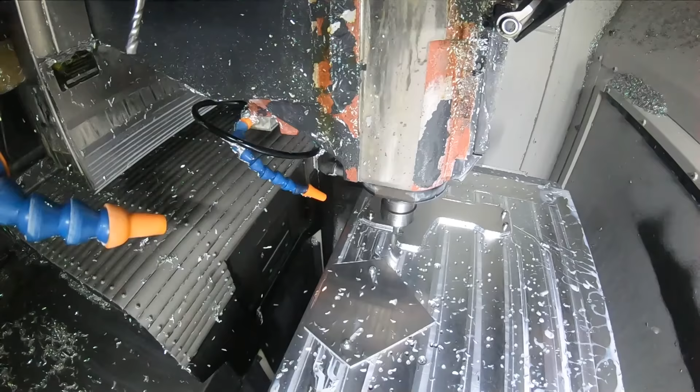So coming up, we break this down into the following topics. Now you'll see the timestamps next to each feature, so feel free to skip to the area of interest, but don't go anywhere yet, as before we head into section 1, cutting tools and tooling, I got Gio and Paul to do an elevator pitch for the subject for those that don't know what a VMC is.

So what is a vertical machining centre? Well, it's normally a three-axis machine where you've got an X, Y and a Z. It's housed in a perimeter guarding so that you don't have swarf flying out and coolant and all the rest of it. It's also got a tool changer integrated into the machine in order to improve productivity, and it's controlled by normally a Fanuc or a Siemens or a Heidenhain or even a third-party control. That generally tends to make up what I'd call a VMC.

What is a VMC? A VMC is a machine tool that makes things. It's referred to by many as a mother machine. It's got a Z-axis, an X-axis and a Y-axis and a spindle that rotates. The components stay stationary on the bed of the machine tool. You can program it with a programming language, and there's several that you can choose from. And watch this program to find out how you can make it more efficient.

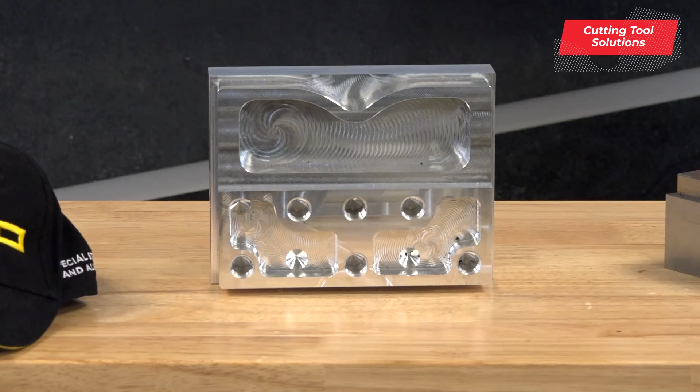So Gio, in this section we're going to talk about how you can improve efficiency by using certain cutting tool strategies and products. Maybe let's look at parts like we've got here and talk about the ways of doing more on a component with less tools, because that's really what it's about, isn't it?

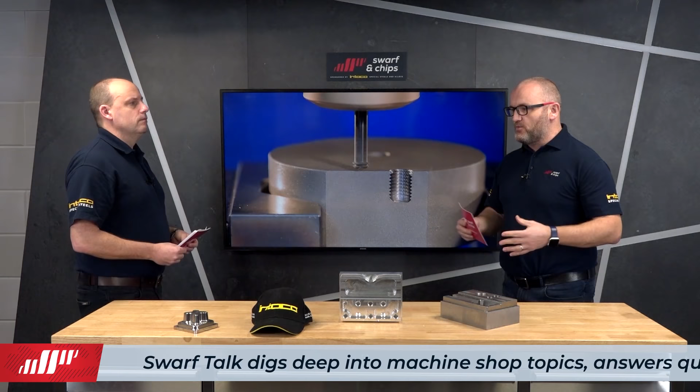It can be. There are times to use more tools to get cycle times down and things like that, but as we look at automating processes now, if you're retrofitting a robot to a machine, often you don't have enough tools in the machine, because what you don't want to do is automate a process but then have to change your tool orders every operation. So using tools that are universal can reduce operations and reduce your inventory, and the amount of tools you need on a particular job can only be advantageous.

But is it a good argument to say that those particular products won't be as good at the individual tasks as maybe a dedicated tool? No, not always. Certainly if you look at solid end mills, years gone by you'd use a 3-flute for pocketing, you'd use a multi-flute for profiling, maybe a 3 or 4 flute for slotting. Whereas now there's some pretty good tools at doing everything out there. If you're doing aluminium, ideally you'd use aluminium tooling, but take that out of the scenario, there's some pretty good all-round tools now.

Okay, let's look at what we've got here, because these are some good examples, aren't they? This is obviously thread milling. Yeah, so this here is a Gühring tool. It's a drill mill, as I call them. They've all got their fancy names, but essentially that's called a Diver, I think Gühring call it. But let's keep up with how the screen's moving. We'll come back to that.

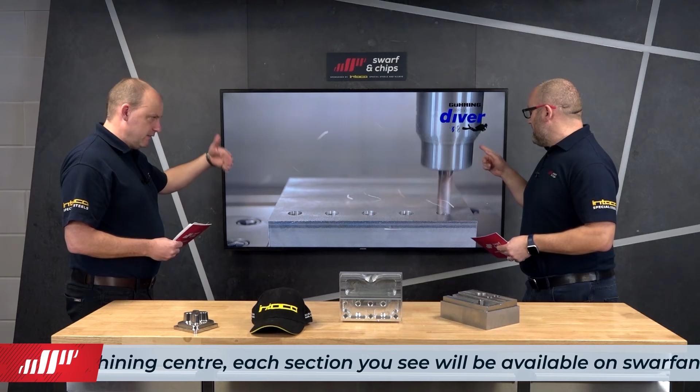Okay, so this is the Gühring Diver. With this, you can see here it's slotting down at various angles. It goes to 45, then it actually drills. And you can drill and open up the pocket with that tool. It's good for profiling, it's good for slotting. So you can see this can replace 2 or 3 separate tools.

And is it capable of cutting steels as well? Yeah, so this is steel we're seeing here. I've seen it in heat resistant alloys also. Clearly you're not gonna use these types of strategies and data, but it's a good all-round tool for sure.

And isn't it going to wear quite quickly though? When you look at the speed that's... No, you'd be amazed. You'd think that, wouldn't you? But that's what these tools are designed to do. So quite the opposite. Okay, next one, we're moving on here.

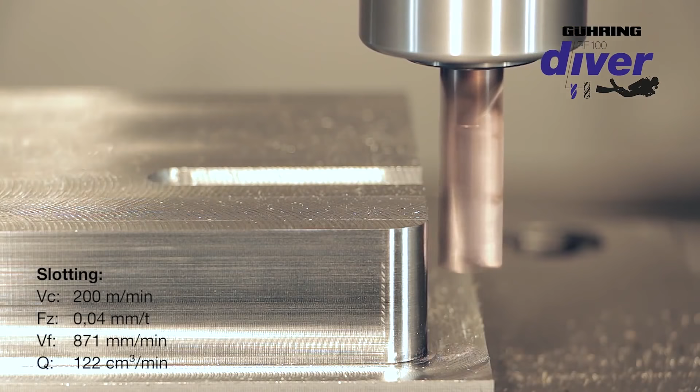This is quite interesting because I remember when I used to be machining the big casings on the diesel engines, I used to have to do chamfers on the bottom and on the top, and there were always different tools. Yeah, so this is basically a drill. It chamfers top and bottom as well. The chamfer's actuated, so you do the top, then it goes back in, retracts, and you go to the bottom, it comes out again, and you do the bottom chamfer.

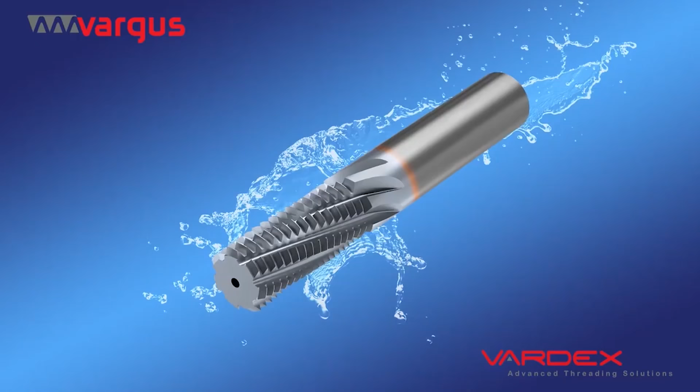And how does that work? Well, that one I believe is driven by coolant. The through coolant puts pressure and it pushes out the chamfer tool. And we're seeing here again another example of opening up a thread. Yeah, so that's been sectioned just for the video essentially. But again, this is a Vargus tool. So that drills, threads and chamfers all with one tool.

So you can see, again, if you haven't got enough positions in your carousel and you don't want a dedicated chamfer tool or a drill even, that does the job great. Because going back, I used to have a drill, an M6 tap, an M8 tap, an M12 tap, but now all of that can be done with one tool. So maybe the tool carousel is important, but if you focus in this area, you can achieve great things with independent products. That thread mill will be for a particular pitch, but you can do any sort of diameter as long as that pitch is the same.

Looking at this part here, would you say then that with all the machining on here, you could minimise the amount of tools that you use? And if you did, would it affect the cycle time if you were trying to use one tool to fit all? Yeah, so that one was done at Fanuc, wasn't it? A live we did, and from memory, probably 6 or 7 tools on there. You could do that definitely with 2, in theory.

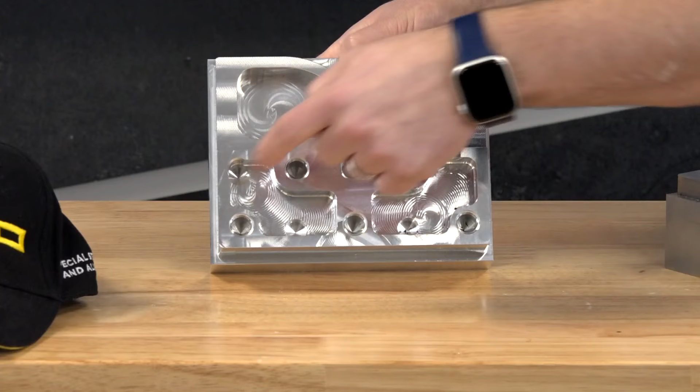2 tools. You could do a universal end mill, aluminium geometry, to do all the roughing and the pocketing. And the threaded holes could be done using one of these tools we've just seen on the screen, which drills, threads and chamfers. Right, so section 2, work holding.

Gio, it's your favourite topic. Firstly, what are the problems in this area in 2 minutes? Go. I'll try my best in 2 minutes, Lindsay. Work holding is probably one of the main aspects in which you can increase efficiency on a VMC for sure. But I think one of the biggest problems is that people don't even know that they've got a problem. And if they don't know, they don't know.

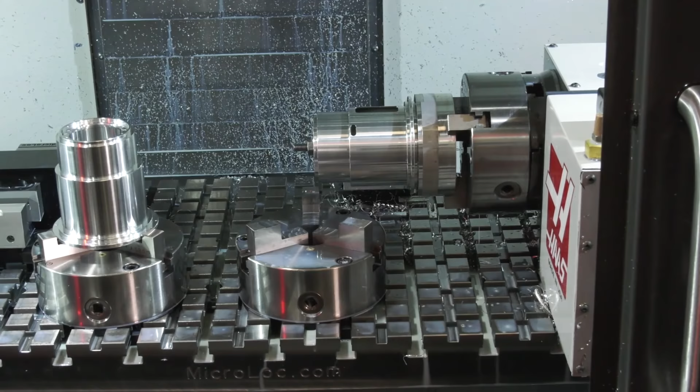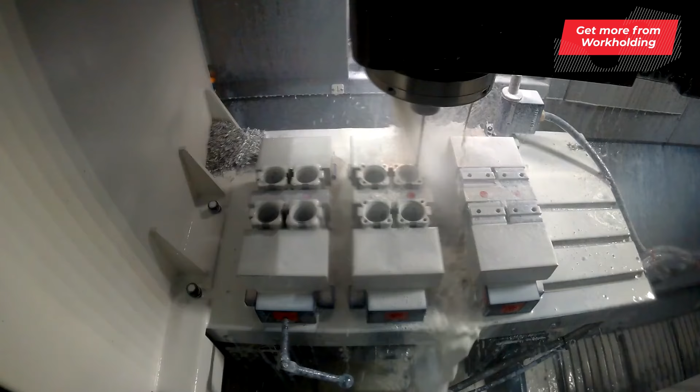You've got different volumes of work that you can put through a VMC. So some people will say, if you're doing low volume work, why do I need to increase my efficiency? Because I'm just doing one today, I might do another another day. I had someone say that the other day. And that is a big argument, and to a certain degree there is an element of truth to that, dependent on the kind of work that they do. However, whether you're doing lower volume work or higher volume work, you can still increase the efficiencies of your VMC through work holding and getting the best work holding on your machine tool.

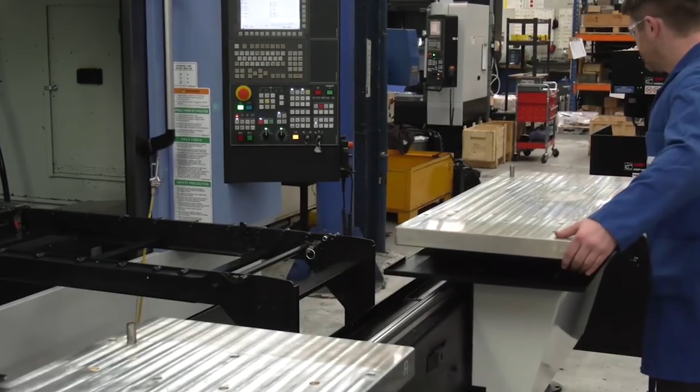Now, the biggest pain point, in my opinion, would be that you're not palletizing your VMC, so you're doing all of your setting in the machine tool, and if you're doing that, the spindle is not turning. So by palletization and universal datum points within the machine tool, you can do all of your setting outside the machine tool, and then when you load the machine tool, the datums are already set. That's absolutely massive, whether you're doing low volume or high volume work.

Another big pain point in work holding is if you're using old technology and you're not holding the part securely, you get vibration, and then you can't run the machine tool to its full capability, so you've got to reduce speeds.

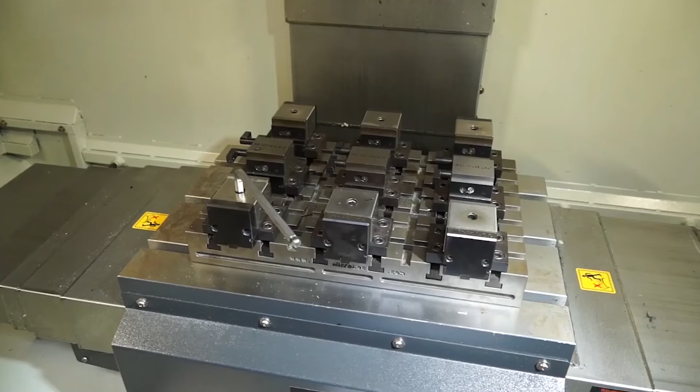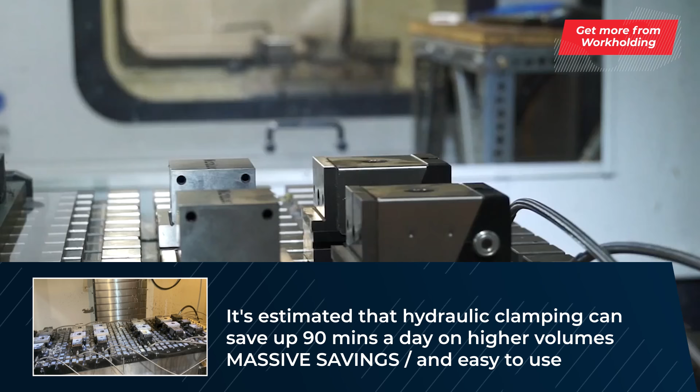You don't get the best tool life longevity, so again, this is very inefficient. Also, with the palletization and moving back to that, another big point, this is probably going into different areas, but the work holding, you can automate it. So if you're looking to run 24/7, this is through work holding, and it's something that you should seriously consider. And I think that's about it for pain points, Lindsay.

Yeah. I've got nothing left to say. You've got nothing left to say, but we've gone well over 2 minutes, and he's delivered all of it.

I think the points he makes are so correct. I think the more you see the guy or the lady in the machine taking parts out, clocking things up, they are what you need to eliminate. So any work holding solution that you can add to that.

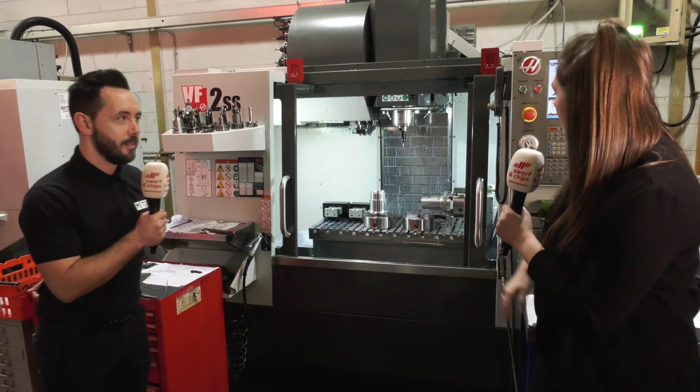Right, okay. So now for some more solutions, and here's an example of what you can get from your VMC using creative work holding. Chloe, perfect example here at Mill Turn of how you can present multiple components to the spindle, and not the same components either. No, definitely not. So as you can see, we've got 2 setups in the vise, so that's used for the VMC. We've also got 2 chucks on there, so we can hold cylindrical material, not just blocks of metal. We've also got a 4th axis unit on there, so you're utilising your VMC while adding an extra axis on there.

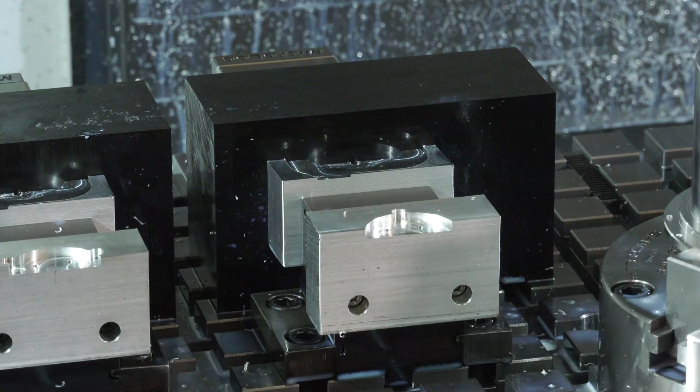Now, when moving from one component to the other, how do you do that with the datum shifts? Can you explain to our audience how you program that? Yeah, definitely. So one part will have a G54, and then the next one will be G55, G56, and so on and so on. And they will all have their own work offset, so they're all their own datum point. So with a setup like this, if you wanted to run it overnight, all you have to do is call up those programs with the set offset.

And what does this give to a company that's got 3-axis machine tools? Is it all about flexibility? Of course, it's all about flexibility. You can then move on to another part. You don't have to keep the cylindrical material on a lathe. You can move it onto a VMC like this. And basically, it's utilising and getting the best out of your machine.

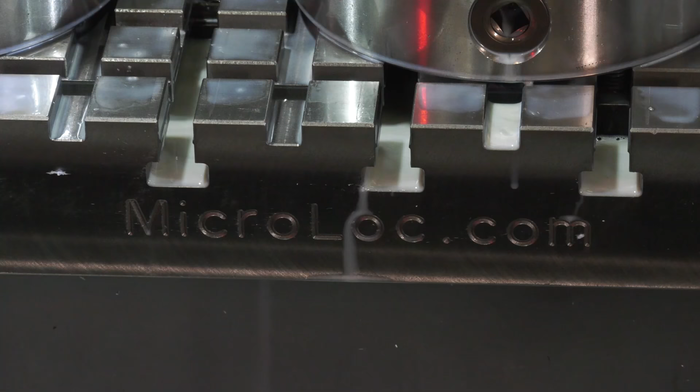Now the base, the MicroLoc base, it's all gridded. What benefits does this give you? So the MicroLoc is great because, like you said, it's gridded. You can space out each vise along the side. You can even machine your vise heads to your own components so they can sit in there nice and flush. Obviously, as well, as we can see, it's overhanging the table, but we've still got that reach. So you are using the table and more to be able to cut your material.

So they're maximising the machine strokes in this particular application. Are they doing anything wrong? No, definitely not. And what they're doing is, like we said again, they're making the most out of their VMC, and why not?

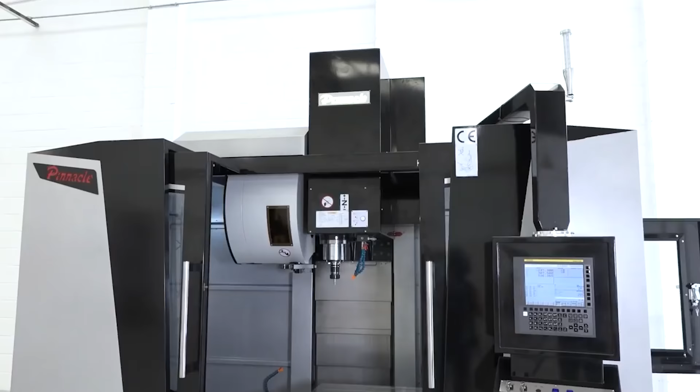So before moving on, let's hear from Alan at Pinnacle Machine Tools, which ties in nicely with section 3. Alan, in your opinion, how can we make machines like this more efficient? So talking about automation, anything like that? Yeah, what we've got on this machine is we've actually got the Blum tool presetter. We've also got the component measurements on here as well.

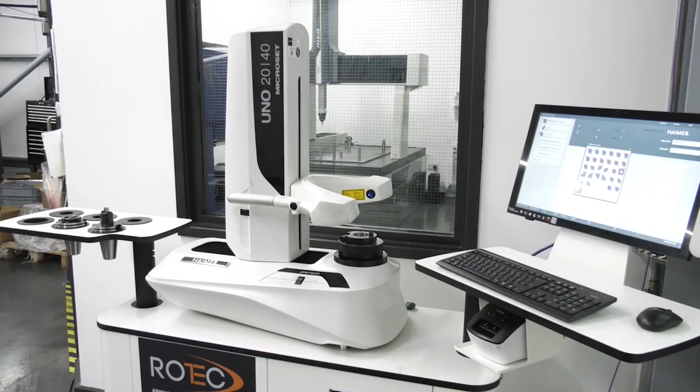Section 3, tool changing and tool setting. Paul, the problems in this area? I mean, tooling is everything because you use lots of different tools for machining components. You need to make sure that they're set quickly. You can do it outside of the machine using a tool setting solution, or you can use, as we saw there, the probing facility to be able to measure them. But if you don't practice those types of things, if you calculated it over a week, you could spend hours actually setting your tools and the spindle not going, which is something you really want to eliminate.

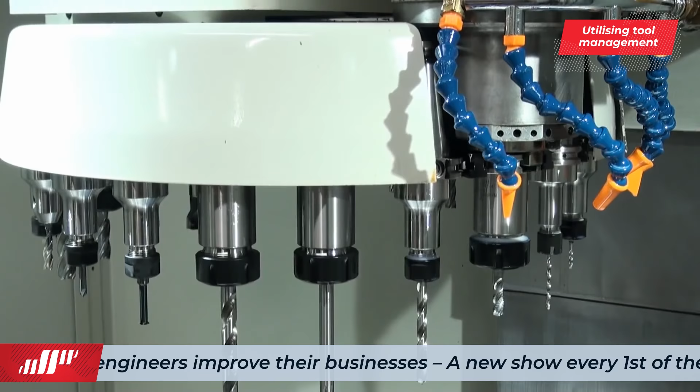It's not just that though, it's about thinking about how many tools you've got in your carousel, because the bigger the tool changer you've got, the more flexibility you've got, and you might not have to stop the machine in order to put more tools in the carousel. That's important. You want to, and we come back to it, you want to keep that spindle running.

So I think that the tooling side is really important, but it's not just the tool carousel and the tools themselves. It's also about how quickly you can change from tool to tool. Now, some tool changers will have sort of bi-directional or quick tool changing, so they'll position themselves ready for the next operation.

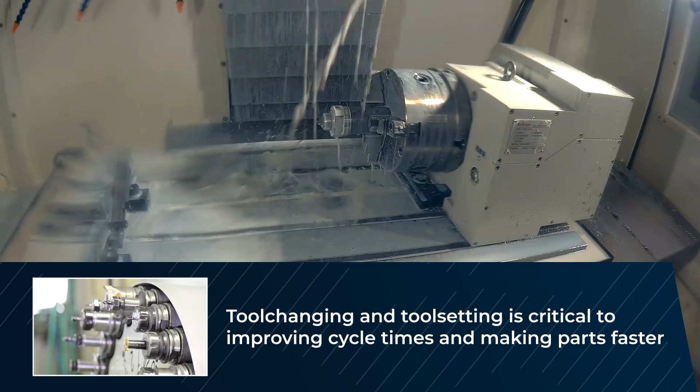Yes. So you haven't got to wait 15 seconds for a tool to go around a carousel. These are all things that you can look at when you're buying a machine. So really you need to be able to get that tool in and out of the machine as fast as possible. The changing of the tools, the chip to chip time will also have an impact, because every time the tool is going out to put a new one in, again the spindle's not turning and the metal isn't cutting.

So all of these aspects are key, but we'll hear more from Anthony Biggs from Fanuc about how impressive their Robodrill is and how they save time with their tool changer. Well, as we talked about, the Robodrill is an incredibly dynamic machine. So it's got a super fast tool changer. The movements around the machine are very quick, but there are still things we can do to be more efficient, to get those parts off quicker.

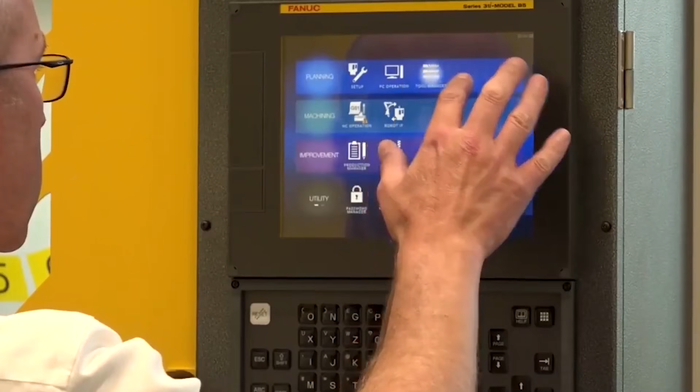So the control, for example, its look ahead functions, its smoothing functions, enable us to adapt the process in order to get the best machining condition, and just really maximise our efficiency. Okay, so tell me more about the tool changer as well, because I can see it's not a conventional tool changer. No. It's not at the back of the machine, so that must save you time.

Yes, it's a mechanical design, and its beauty is its simplicity. Like lots of things Fanuc, it's incredibly easy to maintain, incredibly easy to repair, but it's built around efficiency. The tools are always available, and the numbers speak for themselves in terms of the tool-to-tool and the chip-to-chip times.

Yeah, definitely. Next up, section 4. How about adding an additional axis on the machine? Here's Paul and Joe in Technical Corner. So Joe, we visit many engineering companies and they've got vertical machining centres with 4th and 5th axis units put onto them. What's the advantage to doing that, and where's the efficiency gains?

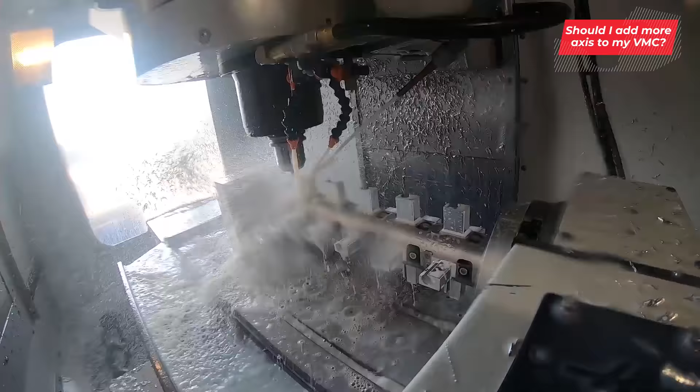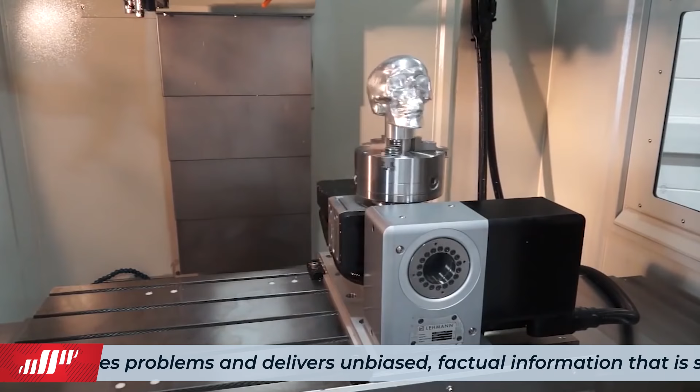Well, I'll be controversial to start. A lot of people want this 5-axis machine, don't they? But quite often, a machining centre with a trunnion system as a 4th axis, or even a 5th axis bolt-on is the way to go. You mean vertical? Yeah, on the vertical. Sorry, on the vertical. So there's different advantages, but to me, you get more faces. You can get at 5 faces, and you can typically get more parts presented to the spindle as well if you're using a trunnion system.

But what you could do to achieve what you're saying is have multiple vices, where you could have Op1, Op2, Op3 and Op4, which would give you the same outcome as having a 4th axis unit, wouldn't it? No, because there are certain applications where with Op10, Op20 you can do 6 sides. Doing it with just a standard vice, you'd struggle. If you've got holes on the side, both sides and underneath, you couldn't do it. Whereas in a trunnion system, depending on how you load it, with your Op10 and Op20 you would get all 6 sides.

And also, it's important to stress that when you're doing it in this manner, you've got less chance of making a mistake, haven't you? Because you're not moving the part through the different operations. Yeah, the mind boggles when we see various vertical machining centres with one vice in the middle, and a girl or a man loading that machine. It's just very, very inefficient. It shouldn't be done, even at low volumes. So whether you use 4th axis, 5th axis, a trunnion system, you need to do something.

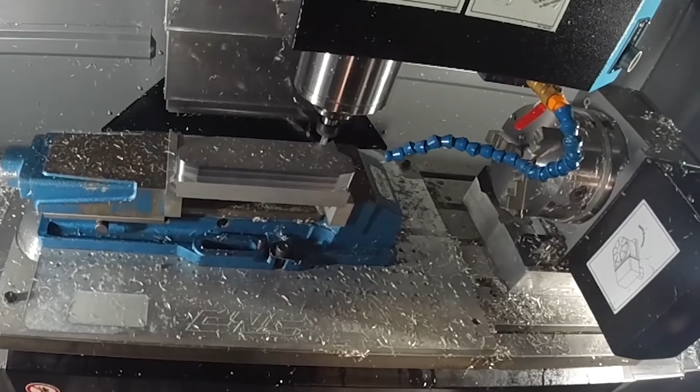And we're going to be showing a new product from Tame Workholding shortly, which fits perfectly into this category. What about getting these units onto machines though? Are there any negatives to lifting on and off and interfacing and programming them, or is it all quite straightforward? Are you losing the gains I'm talking about or not?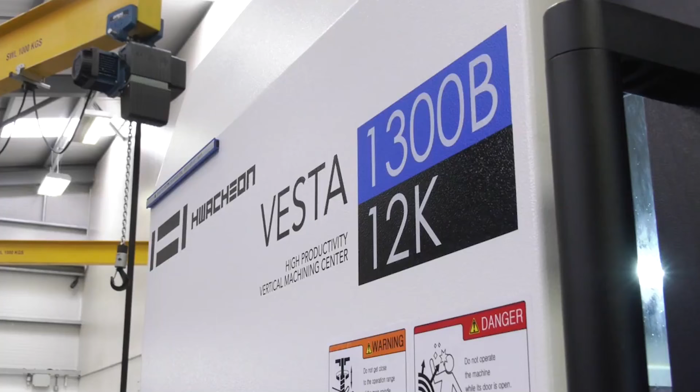Well, quite often you lose Z-axis travel, but not always. That's probably not a big issue to the majority of manufacturers out there. You can zero point rotary tables, trunnions and 4th axis units now. So you're probably going from a 30-minute setup down to a 2 or 3 minute setup. So is 2 minutes that important to you? Yes, but it's unlikely that it is. And you can also set the 4th axis unit outside of the working area as well, couldn't you?

Essentially, or the body of the 4th axis unit, which would mean you can maximise the stroke that you've got still within the machine. That's quite popular, maybe having a base plate on the table, which allows you to put it outside of that working area. So you're not losing your x-axis. That's going to be a gain. Exactly, and to be honest with you, 9 times out of 10, it doesn't need to come off. The only time you need it to come off is if you need the extreme length of that machining envelope. But typically, how often does that happen?

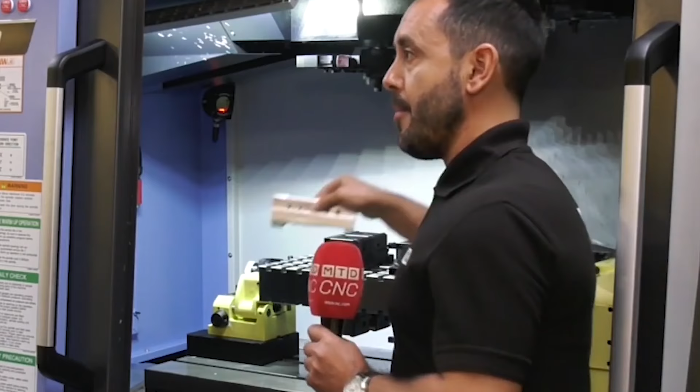I'm not so sure. And also a company we visited, Rigor Precision, they had a 4th axis unit with kind of like a tombstone in between centres with microlock workholding, top and bottom actually, which basically meant they could index that through 180 degrees and present even more parts, as Gio says, to the spindle. That's taking it to the next level, isn't it? Those parts will come off complete, probably, as long as there's no profile and things to do. That's as good as a 5-axis machine.

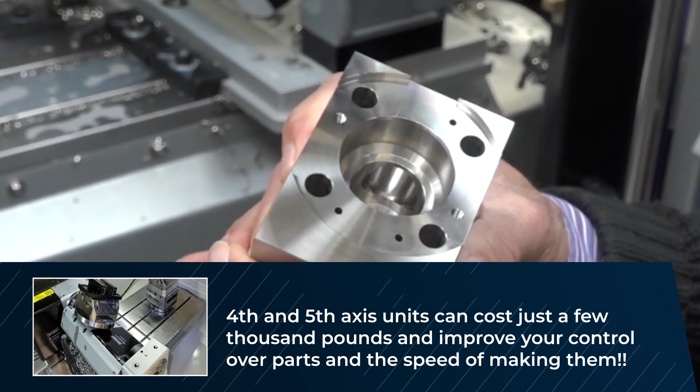I would say 90% of 5-axis work, you still need to machine the face you're holding. So it's still Op10, Op20 work anyway. So you may as well do it on a microlock type system, and there are others. Because you could get 3 faces per side, exactly, which would be your part finished with the 6 sides. Yes, it's still 2 ops. You're just doing it on the VMC rather than a 5-axis machine. But that isn't done enough. To be honest with you, that isn't done enough.

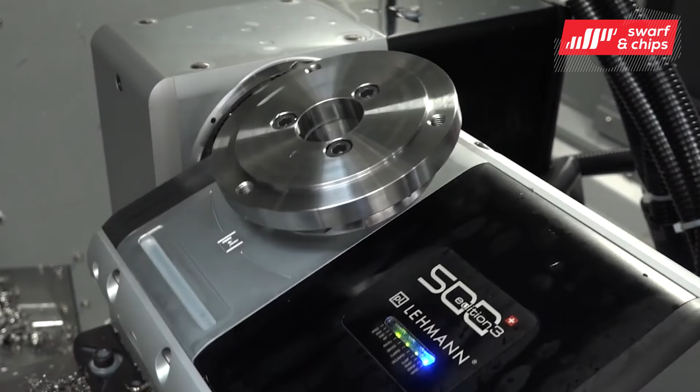Well, what about the 5th axis unit? Maybe let's look at this part here. Is this something that you might utilise a 5th axis table on a machine to do? Yeah, you could. That would come off. Obviously there's no features here. So if it came from your material supplier like that, it could pretty much come off complete, couldn't it? You may have to machine the part you're holding, depending on your drawings and things. But yeah, that would lend itself perfectly to a 5-axis positional part, wouldn't it?

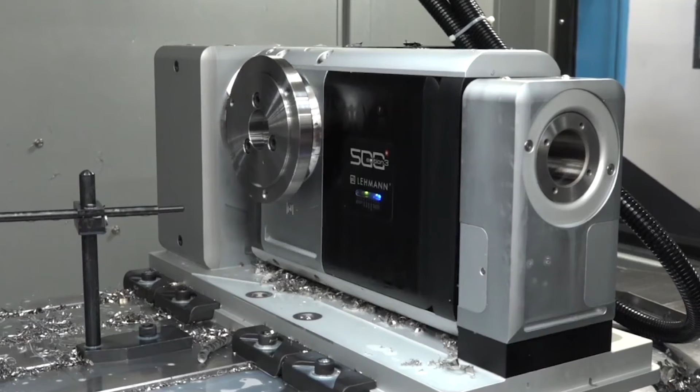Talking about Rigor Precision, we actually calculated, working with him, that he was just over 50% more productive on those components as a result of doing it in that method. So that shows a massive efficiency gain. What would you do? So let's say you're not doing simultaneous work. The majority of the engineers watching this show won't be. Are they better off with a 5-axis machine, often presenting one part to a spindle, or are they better off with some sort of microlock or a trunnion system where they're getting it all 6-sided, albeit with 2 ops?

For the reasons that you say, if you had a 4th axis unit on the machine and you kept it as far out of the working envelope as you possibly could, so you're not losing your stroke, you can leave it there, but you can also utilise the machine. Even if you are not wanting to use the 4th axis, you can still have multiple workholding solutions on the bed as well. So when it comes to flexibility, for me, it's definitely worth adding a 4th axis unit. They're not cheap, but they can make you more efficient. There are some lower cost versions, of which we're going to see a new product in a minute. But there are things like indexers as well.

We talk about 4th axis, but an indexer just moves to a position, doesn't it? And they've got a button on some of these where you could bring a tool in, hit it, and it would index to the next position. Now, that's a pretty low cost way of doing more than one face, isn't it? Yeah, I would argue if you can stretch yourself to get a proper rotary table or 4th axis unit that integrates into a machine tool, that's always the way to go, but maybe it's a good start. Good stuff. Okay, let's hear from Thame Workholding on this new product feature.

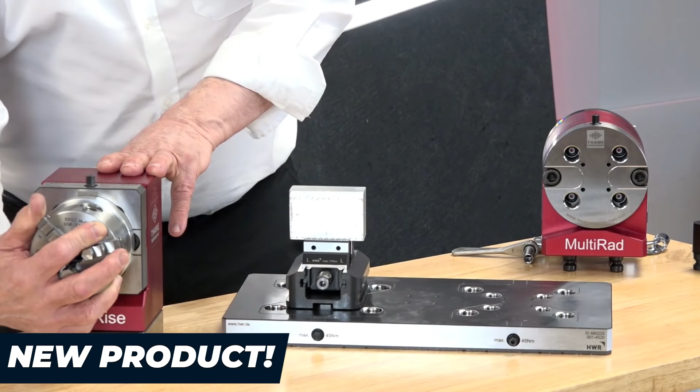our Multi-Rise. Then you can machine in here through 90 degrees, so you can create all 4-axis stuff. The plate also rises, so if you have a large machine and you want to get down, you'd have to use long tools. We're on really short tools. And then, assuming this is your plate on your bed, we have Multi-Rad.

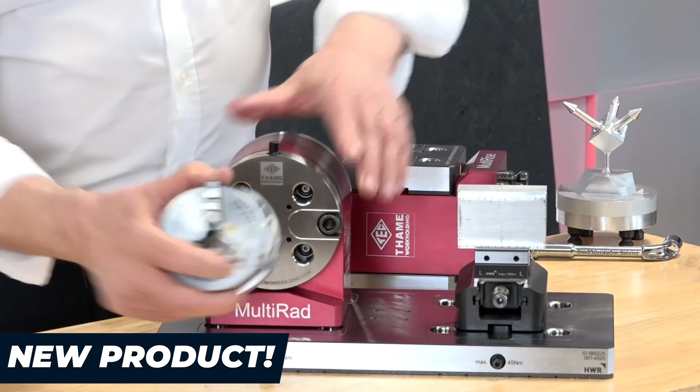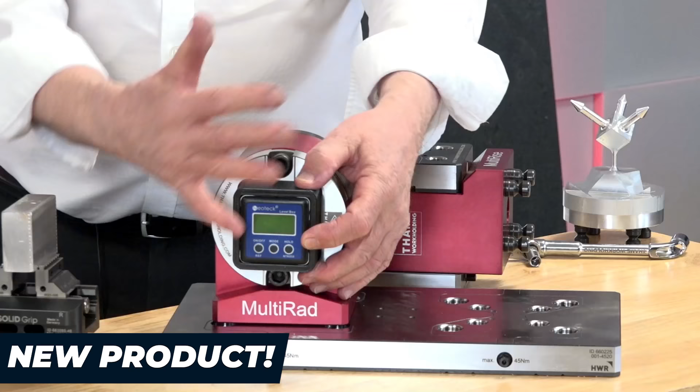Okay, so an indexing head basically. It is an indexing head, but it's an inclining head really. And we use an inclinometer to get the angle, and we use our 0-point, our 4 studs. So we go from 0 to 90 and 90 to 180. Okay, yeah. And so on. So we move around to get all of the angles.

How often do you see a machine shop, 3-axis machine, with a part tilted over, there's some steel, it's been machined at an angle to get the compounds, isn't it? That's great if you've got a compound angle in any part. That's a good idea. This saves you making dozens and dozens of fixtures just to stick a hole in the side or a slot or something like that. That's very simple. If you're trying to make something like this, make the combination.

So we've almost got manual 5 axes. It's almost a manual 5 axes. So stick that in there. You can bring it round, do everything up of course, and then we can machine. Fantastic, yeah. So there we are. So Thame Workholding, that's how you get more from your 3-axis machine.

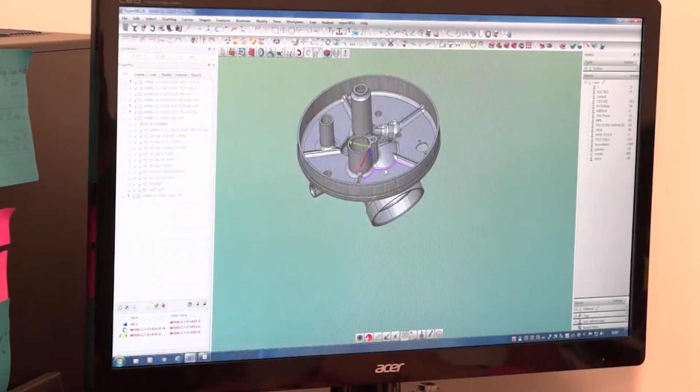That's it. Next up, section 5, control systems and CAD CAM. Gio, Paul, the problems. Well, you start. Well, too polite. I think that CAD CAM is something that originated to make programming easier, and to save you actually programming on the board, and to program off the machine so you can keep that spindle turning. With a VMC, some of the parts that you could be making on there are simple, so you could just literally program on the VMC or on a laptop and send it to the VMC.

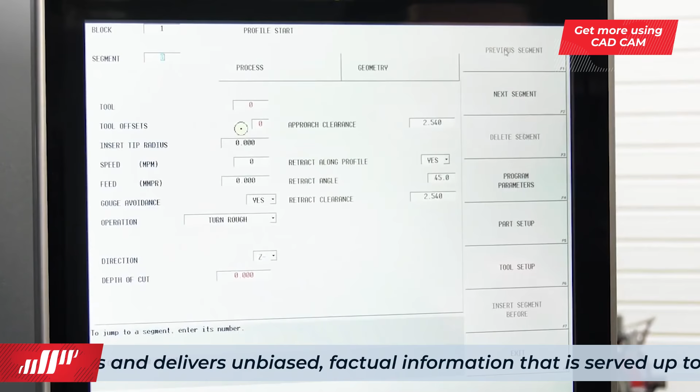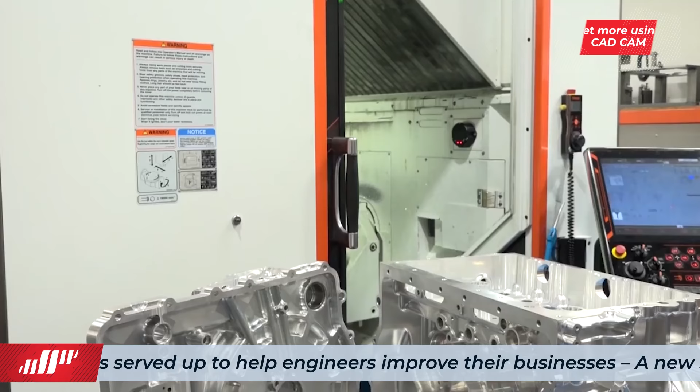For me, the main benefits, really, I know we're still talking about problems, but well, the problem is that the components have become far more complicated and complex than they've ever been before. So hence the programs will obviously be more complex. So that is a problem. So the solution is probably CAD CAM.

I also think though that it's about you point at a part on the table. It's about how you make that part as well, which is what good conversational systems can do, and CAD CAM. So it might create machining paths that make the part slightly differently, slightly faster, which again really improves your productivity. But it might also help you with which tool it selects for which particular part of the application. So instead of having 10 tool changes, you might have 5. So once again, there's savings there.

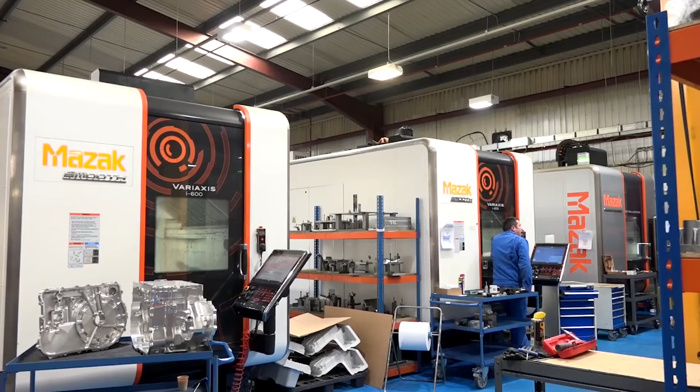So it's taken, I suppose, the intelligence in some instances away from the operator, and it's computing that in the control systems and the CAD CAM in order to make the part faster, do it in the most efficient manner, and really reduce operations. But just to add to that, I think it's Mazak's digital twin, and they say that once they've attacked something in a certain way, it's artificially intelligent enough now to remember it. So if you're then putting a new part on, it remembers that same process for the next time. So actually the machine is telling you the most efficient way of machining a part.

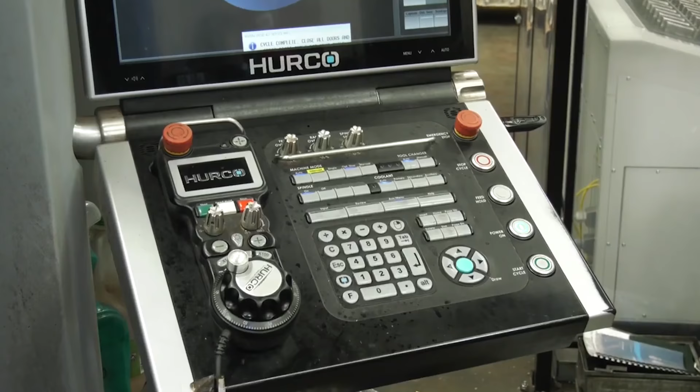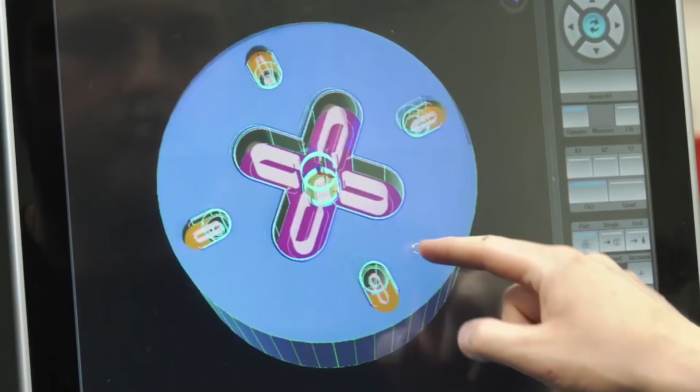And also, like with the Hurcos, you're programming at the machine, and I hear so many good reviews about their CAD CAM system and how conversational and how easy it is as well. It's optimization, isn't it, Lindsay? And artificial intelligence is going to play a big part in the future for sure, and it's simplifying the way in which you can program, which effectively saves time and makes you more efficient.

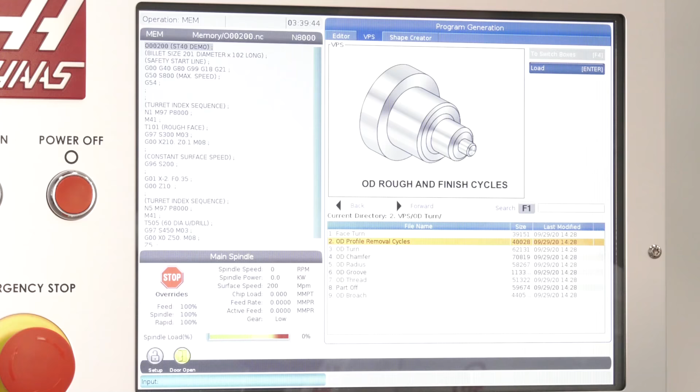And going back to your technical corner, when you're adding more axes to a 3-axis machine tool, a 4th axis or maybe even a 5th axis, then again the operation becomes more complex to program, and that's where you'll get the biggest gains, in my opinion, from CAD CAM, because it's a more complex program. And with the CAD CAM, as you identified, Paul, it really will optimize that program and give you all the best data and cutting data to get the...

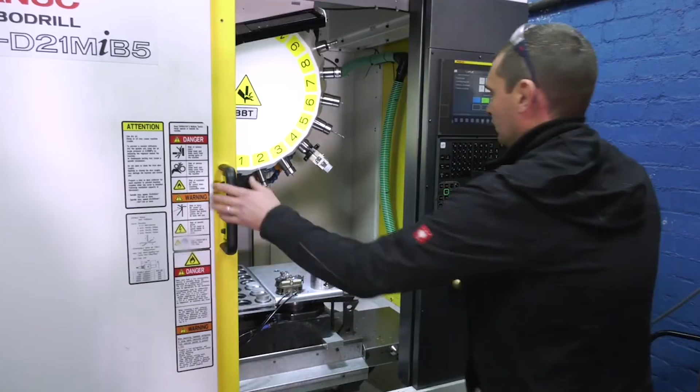And one of the problems is, what used to happen a lot is people used to be programming at the machine while the machine's idle, and then they'd send the program down and they'd start machining. They'd finish the part. They couldn't program at the same time as the machine was cutting in years gone by, but they can do that now. So that's what I was trying to say about the Hurco. They can be preparing for their next job, so that when that job's finished, the spindle stops, part comes out, next part comes in, call the new program up, and you're away.

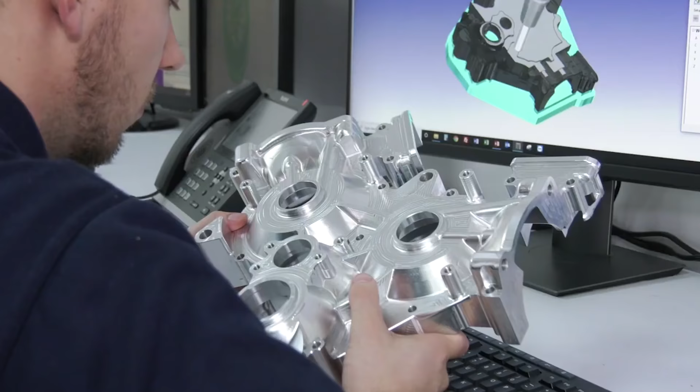The next clip coming up is actually from C&F Precision. Mark here, they use Hypermill from Open Mind. They went away from vertical machining centres some years ago because of their inefficiency. Invested very heavily in Matsuura's machines, and their efficiency now on those machines is sort of mid-90s, high 90%. But it's a different type of technology. But now they're looking at going back to vertical machining centres because they realise now they can make them more efficient than they used to by using some of the strategies that we're talking about in today's show. So let's hear from Mark.

Mark, really interesting to be here at C&F Precision today. Looking at your 5-axis machines that you have here and the automation that you've got in the company, we're talking specifically about vertical machining centres and their efficiency this month on the show. Now, you did have VMCs before, but you would think about having them again, wouldn't you? And what are the reasons for that? We find that by getting rid of the ones we had, we lost a little string to our bow maybe, but at the time it worked for us with the work we had. We're finding there's a lot of work that would actually suit a VMC, so it's definitely something we're going to look at doing perhaps later on this year.

And do you question the efficiency of those machines though? We've been talking back in the studio about 25-30% uptime on the spindles. If that's the case, how do you go about getting more out of machines like that? I mean, it's to do with job selection to an extent. With the right work, I don't believe you'd lose that much spindle time. And then if we program the parts correctly, we obviously get good results that way as well. Because you could add automation to them too as well. You certainly can, yeah. You could automate it by putting a cobot or a robot in front of it, which is something we're also looking at doing potentially.

What about the CAD CAM side? That's the topic we've just been talking about in the studio. How impressed are you with Open Mind's Hypermill software? What does it do for C&F Precision, and how would it incorporate itself into efficiency gains on a VMC? So the software is excellent. With the right parts, you could program anything you wanted on Open Mind, and you get good versatility within certain tool paths. So you can go from standard roughing cycles to trochoidal roughing cycles if the right part is on the machine. So do you think that you could make productivity gains using CAD CAM on a vertical machining centre? I think you could. With the right parts, if it's larger area parts that don't perhaps fit onto one of the machines we currently have, I definitely think there is scope there for us to utilise one of those machines.

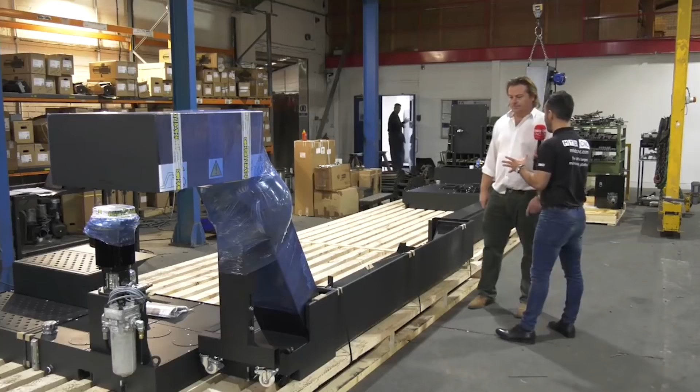So the penultimate subject, and section 6, is swarf. Now this can be a productivity killer along with coolant control. So Paul, let's start telling me where the problems are, but also what can happen if preventatives are not used to control swarf. Swarf's massive, isn't it? Sometimes I look at people buying vertical machining centres without swarf conveyors, and you just think, okay, I know space could possibly be an issue, but you've got machines where swarf conveyors come out of the back, so they don't necessarily have to come out of the left or the right. But how many times have I seen a guy in a machine digging out swarf, and you just think that is such a waste of time? So to avoid that is critical.

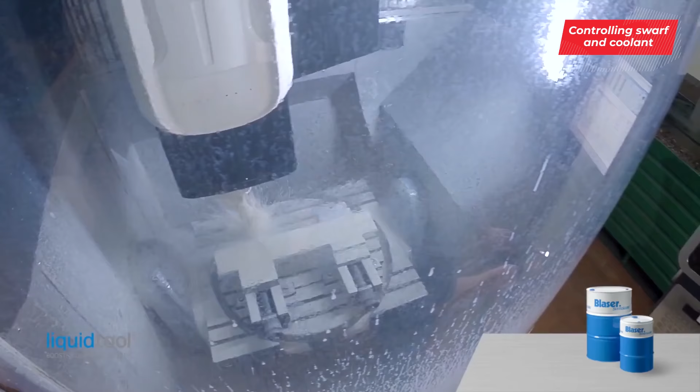The coolant side of things as well, you can make so many efficiency gains. You can make your cutting tools last longer by using the right coolants. The recycling of coolants, the coolants that you use, can be better than other coolants, which means you get better efficiency from your machine. But you talked about through spindle coolant.

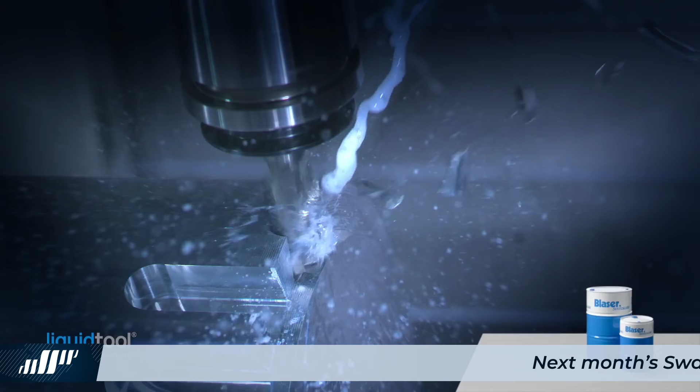Well, you were going to mention something about that, weren't you? Yeah, you get up to 80 bar through spindle coolant, which I think is massive as well. You know, because if you're doing a deep bore, for example, you're getting that coolant right at the point of cutting, and obviously that gives you better feeds and speeds and better tool life longevity across all machining operations if you've got the right coolant for the application, and it's absolutely critical.

Clearing the swarf also has a good impact on the coolant as well, because you can go in and look at some of the coolant tanks on some of these VMCs. They're so dirty, and they're not cleaned. Filtering the coolant, say if you're doing cast iron, you can get magnetic filters that can take the cast iron out of the coolant. And again, cast iron, although you can't see it in the coolant, once it's in that system, it will erode the cutting tools.

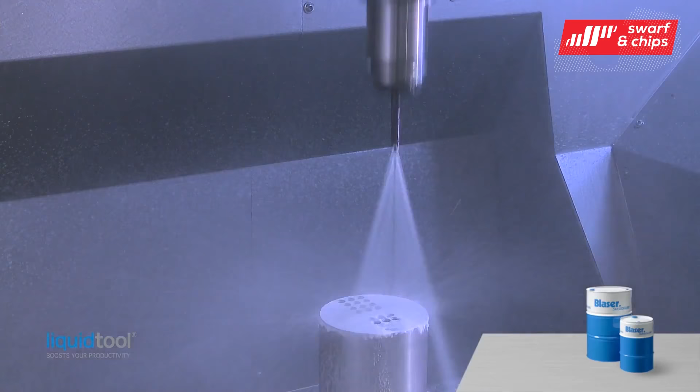And swarf build up in the machine tool, not just in the machine tool, but say for example, if you're using 1960 technology workholding products where the swarf can get into the lead screw, how many times do you see it that they've just finished one part, then they've got to get the air guns out and blow out all the swarf? Not only is that taking time, but that's a bit of a health and safety hazard as well, because the swarf's flying everywhere.

It's the reliability of the machine as well. If some of these factors you're talking about from a preventative maintenance perspective aren't utilised, then machines can break down. Machines can become inaccurate, which again affects the efficiency. If the machine's broken down for whatever reason, you can't use it, so the spindle's not going to turn.

You can use air blasts and things to clear swarf out of the machining area, which is quite important as well, because you get these trapping points in machines where you get this swarf build up. By having coolant flood wash around the back, you can get swarf into the conveyor and out of the machine. There's lots of things you can do in this area, other than just going in with a hoover to hoover it out. Yes. A lot of people do it. They do.

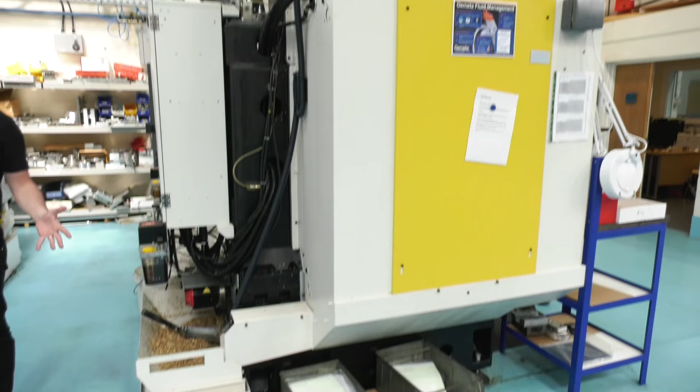Paul, when we were at R&G Precision the other day, we saw those Robodrills, and I'm not kidding you, I've never seen how small the swarf conveyor was. The swarf was literally coming out the back and didn't even take up barely any room. Yeah. Just a tiny footprint of a machine, and then this tiny swarf conveyor, and you could see it was just so simple. Away from the machine.

The slants on the bottom of the machine, the way the swarf falls when it hits the machine, are important points to consider when you're looking at a machine, because if it's got a gradient, it will fall away, it will fall into the conveyor, it will be moved out the back using the wash facilities. Really simple. All of these things are important, because spending 10, 15 minutes, half an hour, an hour a day in a machine getting rid of swarf, it's not efficient.

100%. And another really big point, I know it's moving on a little bit into one of our future segments, but if you're looking to automate that machine and run it 24/7, you need to make sure that you're getting rid of that swarf overnight, or that's going to cause you massive problems. But also, like we mentioned, with tool life longevity, if you've got a small tooling carousel, you can't afford to have doubled up tooling in there. So it's absolutely imperative. We're looking at efficiency gains on a VMC, and probably one of them is running it into a second shift.

How would this work? Just a random idea. Here we go. If you had a massive suction thing in the machine that just rips out all the swarf, so you don't need a conveyor. Suction or magnetic, or a bit of both. Well, it'd be suction. You'd need to really pull it, as it's cutting at the spindle, like a massive hoover that just pulls all the swarf. Patent it, Paul. Good idea. We'll leave you with that one. There's never any swarf in the machine, but you don't need a conveyor either, which takes up space. And then where does it go?

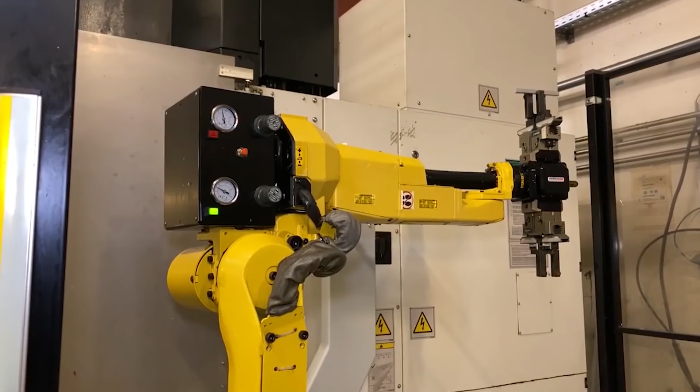And the problems are, again, we keep saying it, when the spindle's not being utilised or being used. That's where your efficiency goes out the window, when that spindle's stopped. By automating the machine, you are going to eradicate that from happening. You're also going to mean that operators can go and do other things in the machine shop. So really, the automation is becoming so crucial to making a VMC more efficient.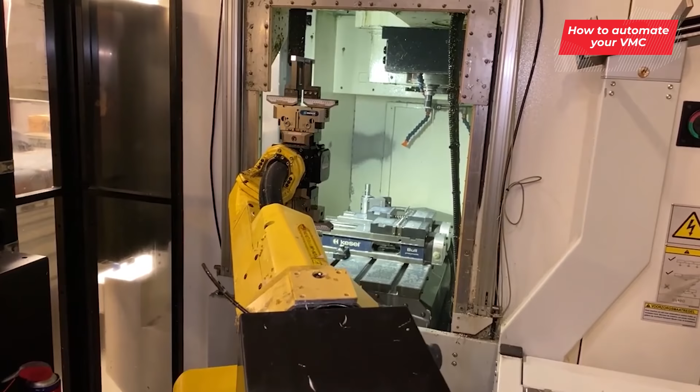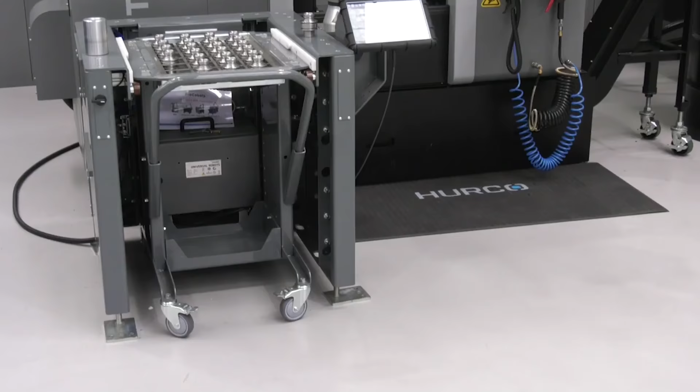Be interesting to see what the results of the survey are, which we'll talk about shortly, because I've got a prediction that I think people will be very, very wrong, because I think the efficiency of these machines isn't what people think. There are many solutions, and I know Gio is going to mention a few as well, but you can use cobots that you can manually move to show them what the path is to load parts and take parts out of the machines.

You can use palletization systems, pallets that you can attach to a vertical machining centre, like the Mayland system or a Midaco system that can keep pallets moving in and out. There are the XYZ systems, the Robo 10, where you can actually move it from one machine to another, and you've got drawers that you fill up. Mill CNC do one as well. Fanuc do them too. And in fact, Hurco do one as well. So there's plenty of these pallet systems, and they're very, very easy to program.

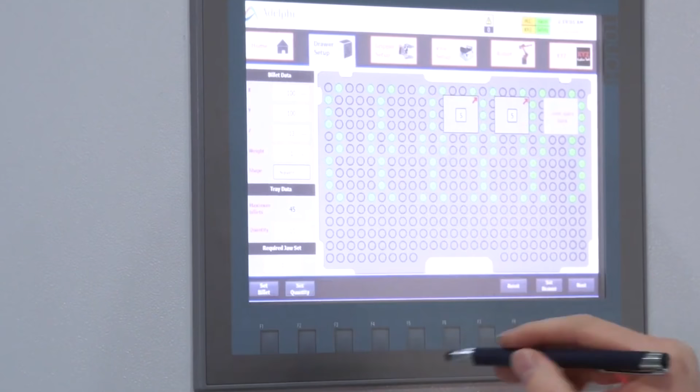They've developed their control systems, so even a person with the most limited experience on a machine can work these things. They've merged them together. At the end of the day, they want to sell a vertical machine centre, and they've got something else to sell that works with it. So they're going to make it as in simpatico together as possible.

In simpatico. Together. And by the way, I'll get some people on the thesaurus and the dictionary going, to make sense, that doesn't. Lovely word. There's two words. It's two words. Lovely words. In simpatico. Go on, carry on. I'm going to give Dyson a call, actually. I love your invention. I think that's got legs.

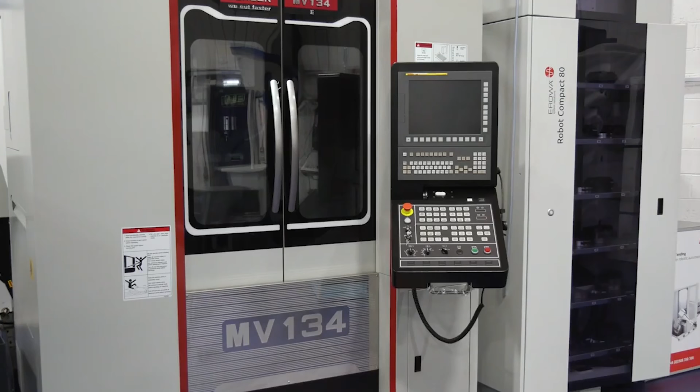In regards to solutions, Paul, blimey, there's so many. How many shops I've visited over the years where the last machine to be automated would be a three-axis VMC. Very rare I see a three-axis VMC automated. And if you can automate it, whether you're doing low volume work or high volume work like we've mentioned, imagine the instantaneous productivity gains that you would get from that.

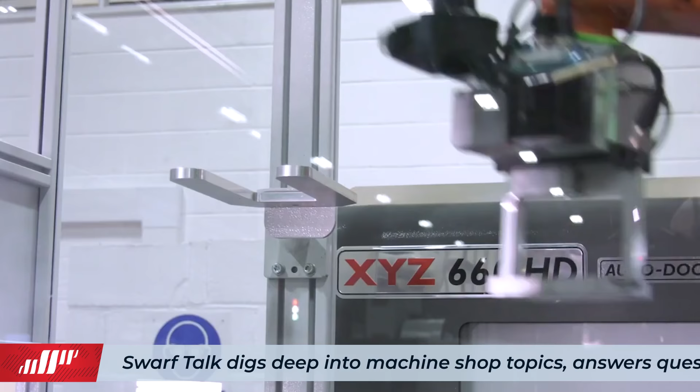In regards to the work holding there, if you're doing high volume work and you're making the same part on a VMC every day, you can get hydraulic or pneumatic work holding solutions. So the robot can put the part in, the work holding opens, closes, it communicates with the control system. Or if you're doing different work all the time, palletisation, as you mentioned, is absolutely perfect. But I think automation is one of the biggest aspects of all of this. It's the cream of the creme to get that efficiency.

Cream of the creme, isn't it? Cream of the crop. Is it cream of the crop? I thought so. Creme de la creme, that's the one.

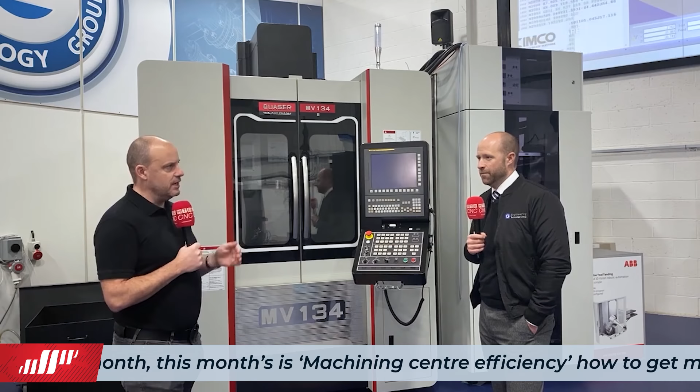There's two ways of looking at this. There's buying a machine that already has automation fully integrated into it, and we don't want to move into 5-axis because that's not what we're talking about today, or adding automation to a machine. I interestingly went to a tool maker who has just bought an Erowa system to go with a Quaser vertical machining centre. And he's a tool maker, you know. Now he's doing that because he wants to make sure that his spindle on his VMC is running for as long as it possibly can. And he's going to be loading bolsters, big tools, onto the Erowa system, pulling one out and putting another one in.

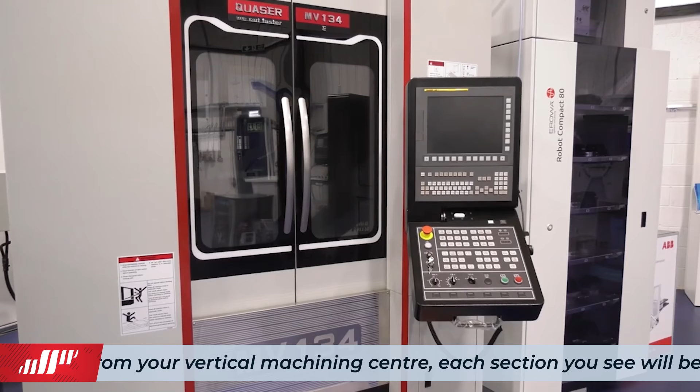So he hasn't got to, you know, imagine doing that with a crane. You've got to open the doors, you've got to get the crane in, crane out. So all that work's been done outside of the machine. So there are so many options with automation to be added to the machine, and they will, you know, unequivocally improve your efficiency.

I think I need to lie down now. I think I need to lie down. Unequivocally, that's a beautiful one. Instantaneous. That is emphatic. I mean, what have we done? Swallowed a dictionary.

One example, though, and I've got to use this example. I think we were talking earlier before the show. There's a company that's got 21 VMCs, and they're using one particular work holding solution per VMC. And they believe that everything they're doing is absolutely perfectly correct. But just imagine if they incorporate some of the solutions that we've discussed today. Potentially they could be doing all of their work on 4 or 5 VMCs. And that's not crazy actually, it's reality. Some of these solutions that we're discussing can make a massive impact. Yeah. So to conclude, there are so many areas you can up your productivity.

Paul and Gio, the results of our survey, the answer is 62% is what people in the majority have selected. Do you think that? Definitely not. Nowhere. No way. I know we've had this conversation before. Even before this program and doing all this research, it's probably under 32. I wouldn't even suggest it's 32. You know what? I've been out to machine shops, and there's so many machines that just sit there idle, and you just think, what's the point? I don't quite understand why you'd have a machine there. You must have invested and put your business plan around that investment, and then for it to sit idle. There'll be one machine running and 3 idle. What's the point in having those other three? Just have 2. And maybe one, and make that one more efficient.

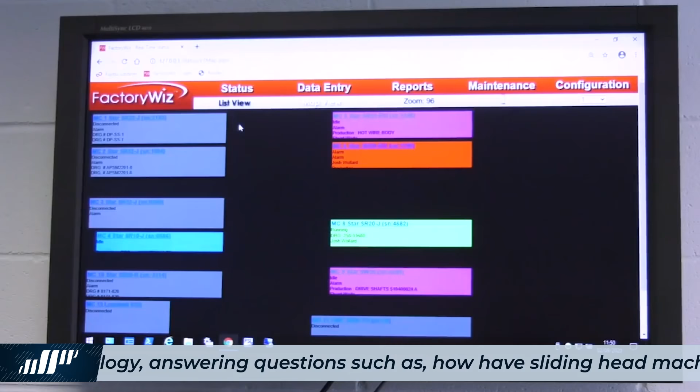Definitely. Right, before we wrap this up, guys, how do you monitor efficiency? How can engineers watching this establish if they're efficient or not, Paul? Well, I'm going to talk about a particular product here called FactoryWiz. There are a few products available in the market that are supplied by the equipment manufacturer, integrated into their machines, but there are ones like FactoryWiz which you can connect up to all of the machines in your machine shop. This is where it will be a real eye-opener, and the piece we're going to cut to in a minute is a company that has invested in FactoryWiz, and they've identified that their VMCs were around 40% efficient, I believe. They said that to us. That's not bad. It's not bad, but they're aiming to get that to 60.

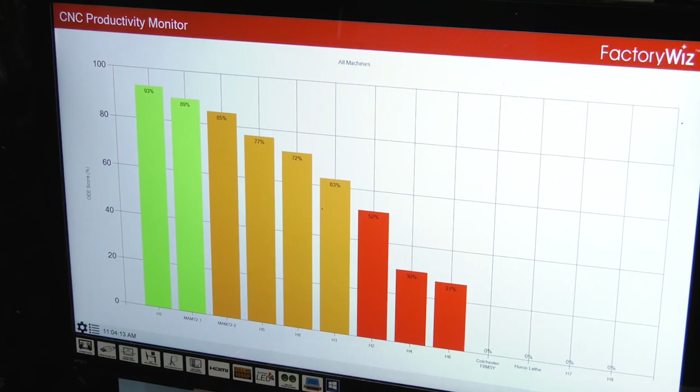And what something like FactoryWiz does, connected to all of your machines, whether it be a lathe or a VMC, it will tell you when the tool isn't in cut, and also the reasons why it's not in cut. Tool breakage, guy in the machine clearing swarf out, tool setting, whatever these things we've mentioned in today's show, FactoryWiz will identify where those areas are. If you can't measure it, you can't make improvements. How can you solve it? Exactly. So this is a really interesting feature. So let's hear from Future Design.

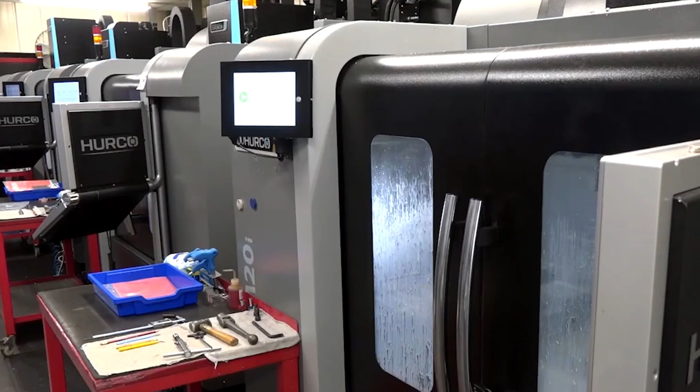Efficiency is a good area to jump onto then. What is it that you do in your machine shop that makes it efficient? We obviously use FactoryWiz software that monitors the machines and also the way we go around jobs. We're running probably 40-45% efficient. We want to get up to around 60-65% over the next couple of months. Up to maybe a year ago, we were holding jobs in old-fashioned vices that take up a lot of bed space, whereas now we're moving towards smaller vices so we can get multiple jobs on the beds, which again will make our efficiencies better.